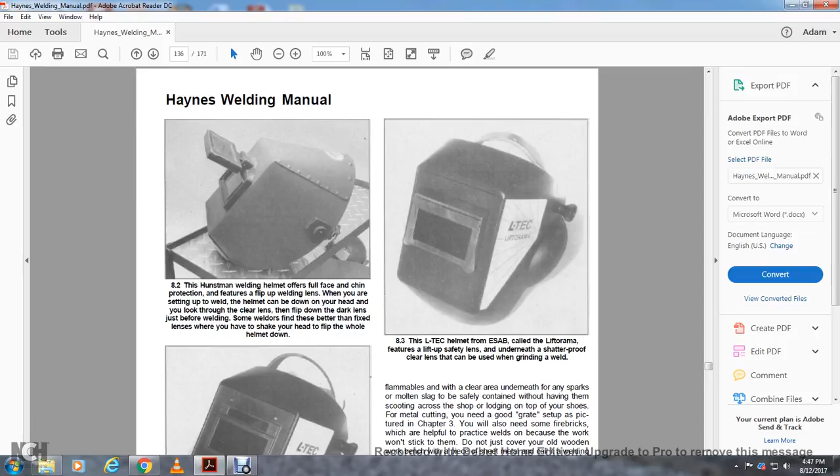8-3. The L-TEC helmet from ESAB, called the Liftorama, features a lift-up safety lens underneath the shatterproof clear lens that can be used when grinding a weld.

8-4. The L-TEC helmet Weldorama offers a clear sight plate and a separate welding lens, so the welder can keep the helmet down, then just shift his eyes to the dark lens when he's ready to weld.

Keep flammables clear, since sparks and molten slag can scoot across the shop and lodge on top of your shoes when metal cutting. You need to get a good grate set up, as pictured in Chapter 3.

You also need some fire bricks, which are helpful to practice welds on because the work won't stick to them. Do not just cover an old wooden workbench with a piece of sheet metal and call it a welding table. Invest in a piece of plate from the scrapyard.

When you put a lot of heat into your welding projects, a tin-covered wooden surface can heat up enough to start the wood smoldering, and perhaps even start a fire after you have left the shop.

Also, you must have a proper fire extinguisher on hand, preferably an ABC type or halon that can put out all kinds of fires.

Much of the work of sizing and joining materials for home shop projects involves tools you already have, such as drill presses, grinders, sanders, clamps, measuring equipment, squares, and levels. Common hacksaws can be used to sever lengths of material, but can be tedious on heavier stock.

Sheet metal can be cut with aircraft snips, tin snips, manual electrical nibblers, or a plasma cutter. Many of the tools shown are special purpose tools that you may not already have, which perform special functions related to improving the welding work or holding materials to be welded.

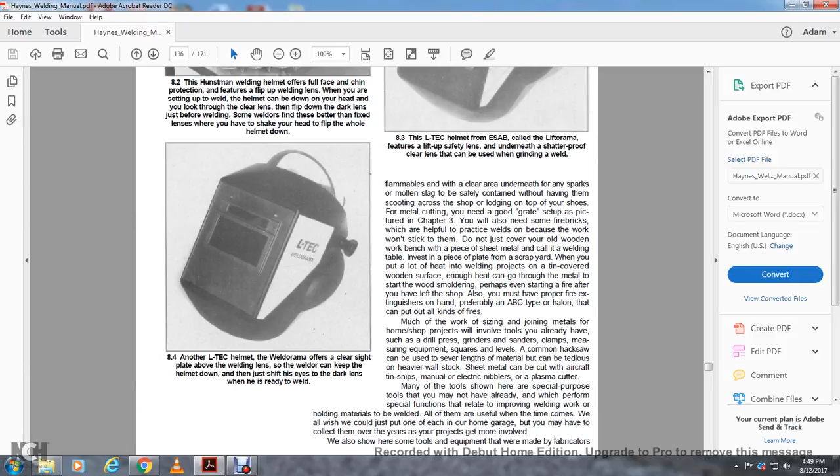We'll also show here some of the tools and equipment that were made by fabricators.

8-5. The Scanorama helmet was designed for the MIG and TIG welding application, with a large shade 5 filter disc surrounding the welding lens, so you can see most of the details through the area, while your skin is properly protected from radiation through the dark portion of the welding mask.

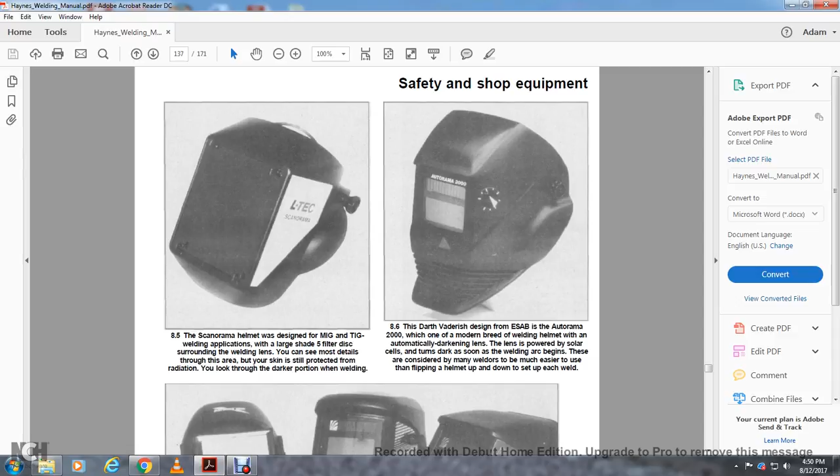The Darth Vader-ish design is the ESAB Autorama 2000, one of the modern breed of welding helmets with an automatically darkened lens. The lens is powered by solar cells and turns dark as soon as the welding arc begins. Many welders consider these much easier to use than flipping the helmet up and down to set up each weld.

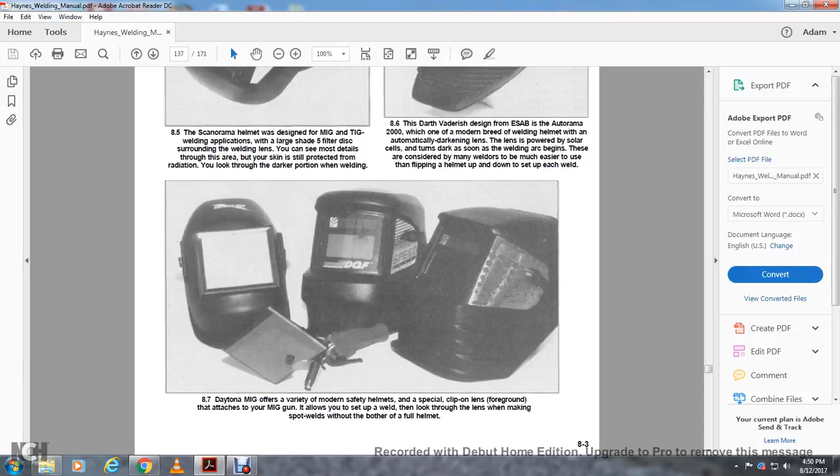Daytona MIG offers a variety of modern safety helmets have special clip-on lenses for foreground attachment with a MIG gun. You set up with a weld, then look through the lens to make spot welds without the bother of a full helmet.

8-8. A good pair of leather welding gloves will also last you for many years, but if you are using oxyacetylene equipment, keep an extra pair for that use, since a greasy or dirty glove combined with oxygen could cause combustion. So don't use good gloves for handling hot or dirty parts.

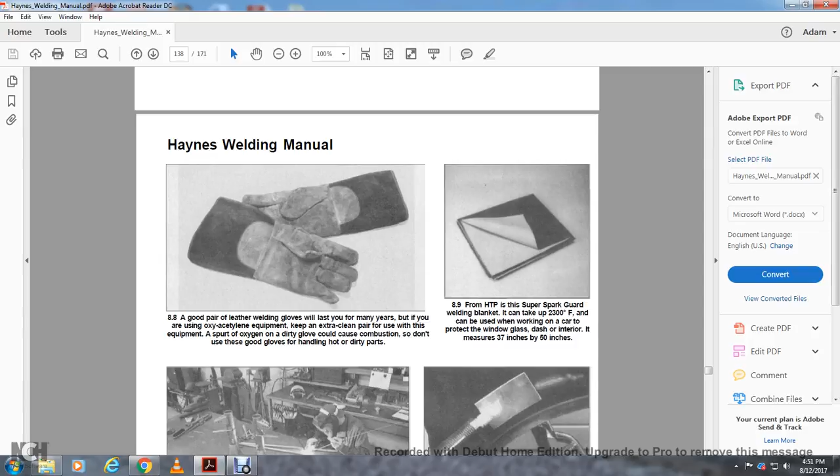Item 8-9, the HTP Super Spark Guard welding blanket. It can take up to 2,300 degrees Fahrenheit and can be used when working on the car, protecting window glass, dash, and interior. It measures 37 inches by 50 inches.

8-10. A clean, safe welding table area promotes good work in your home shop. You need a steel plate table, though your home shop won't need a table as big as this. What matters is keeping things uncluttered and organized like a professional shop. A rack under the table holds all the C-clamps.

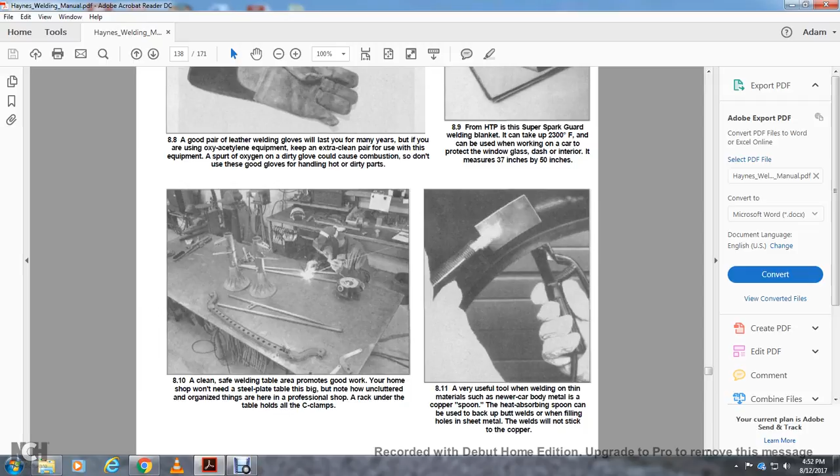A very useful tool when welding on material such as new car body metal is the copper spoon. This heat-absorbing spoon can be used for backing up butt welds when filling holes in sheet metal. The weld will not stick to the copper.

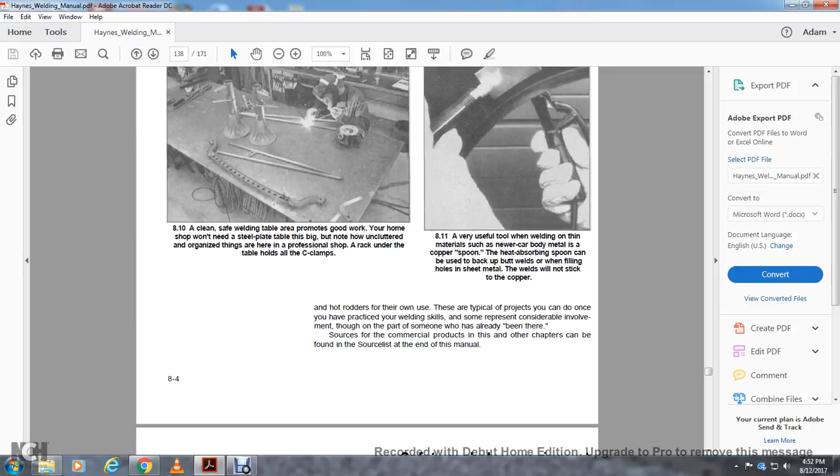Hot rodders making products for their own use is typical once they've developed welding skills. Some represent considerable involvement, and are only for someone who already has experience. Sources for the commercial products shown in this and other chapters can be found in the source list at the end of the manual.

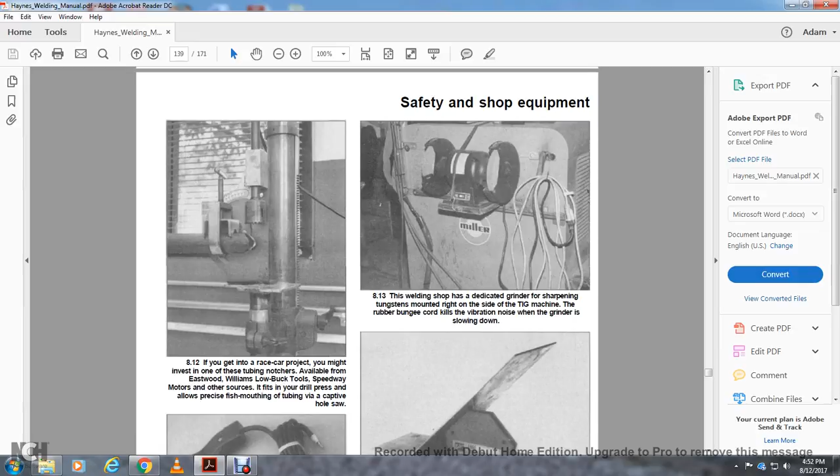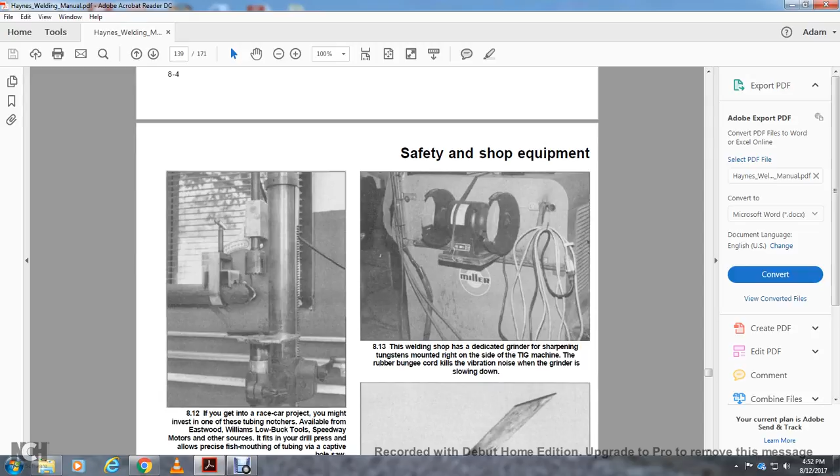8-13. A dedicated welding shop grinder for sharpening tungsten, mounted right on the side of the TIG machine. A rubber bungee cord isolates the vibration and noise of the grinder while it's running.

8-14. Magnetic clamps are handy for holding parts in alignment at various angles for tack welding.

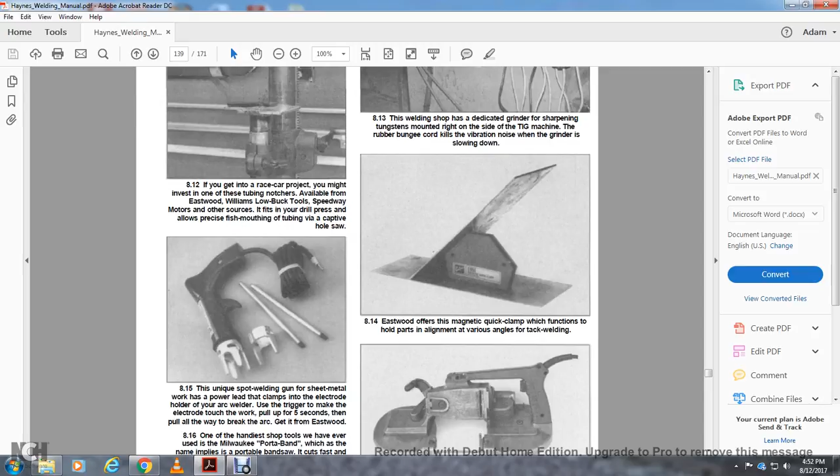8-15. A unique spot welding gun for sheet metal connects to the power leads and electrode holder of your arc welder. You pull the trigger to touch the electrode to the work, hold for about 5 seconds, then pull all the way to break the arc. You can get this from Eastwood.

8-16. One of the handiest shop tools you'll ever use is the Milwaukee Porta-Band. As the name implies, it's a portable bandsaw that cuts fast and straight, very helpful for cutting tubes, angles, and other chores associated with welding projects.

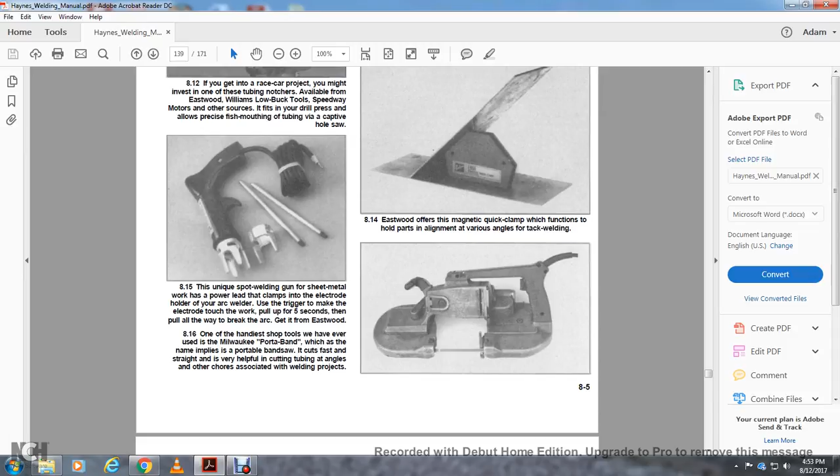8-17. An abrasive cut-off saw is very fast and secure for cutting large amounts of tubing. The work is held in a movable vise so angle cuts can be made. This one is cleverly mounted on a 55-gallon drum to capture all the sparks and debris.

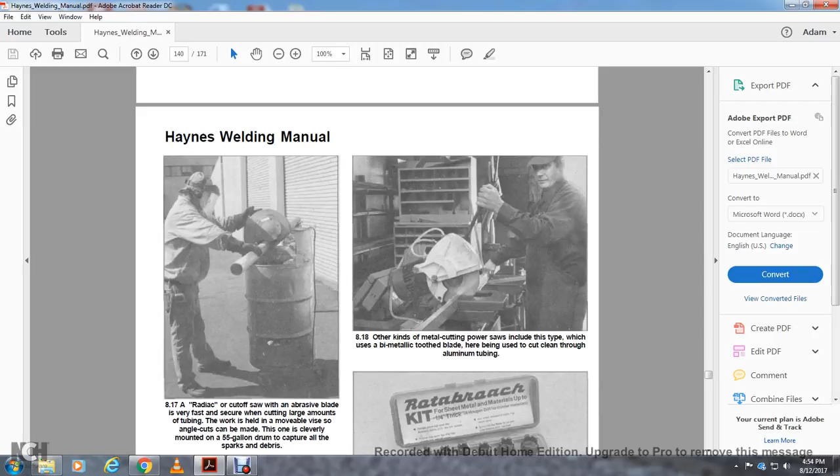8-18. Other kinds of metal cutting power saw blades include the bi-metal tooth blade, which cuts cleanly through aluminum tubing.

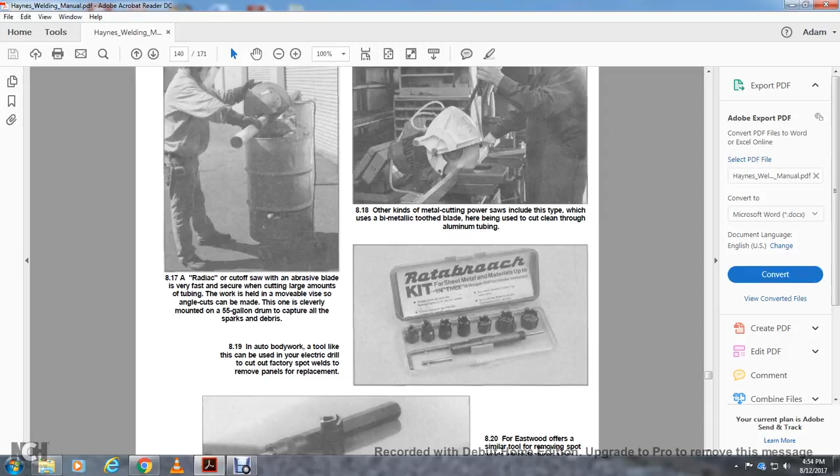8-19. An auto body tool, used in an electric drill, can cut factory spot welds to remove panels for replacement.

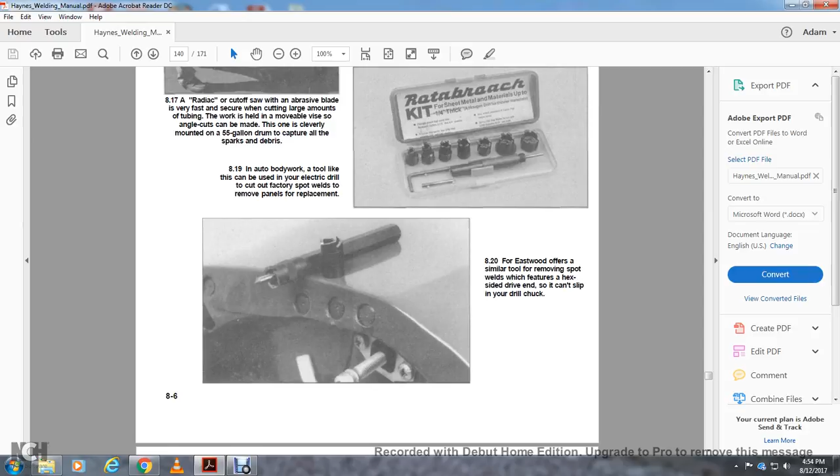8-20. Eastwood offers a similar tool for removing spot welds, featuring a hex drive end so that it cannot slip in your drill chuck.

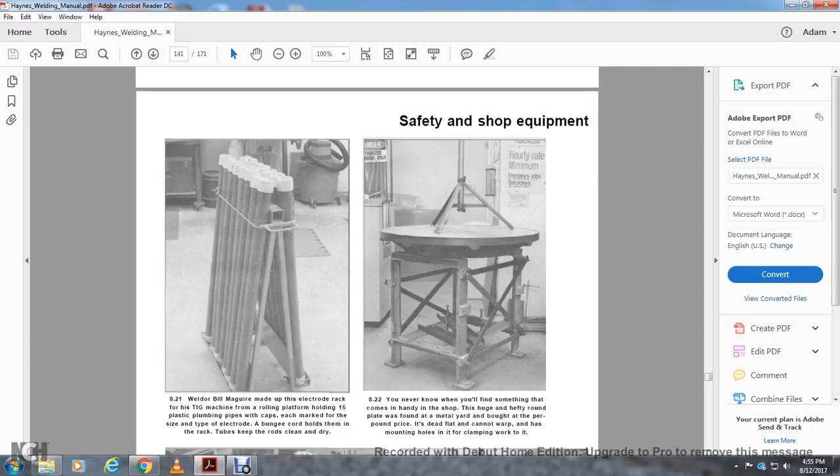8-23. If you plan to do any ornamental ironwork, making brackets and pieces like this, an ironworker is very handy. It can bend solid round, square, or hex stock, as well as round tube and flat stock, into repeatable shapes. A disc sander of at least 1/2 horsepower is also very handy around the shop for squaring edges of flame-cut parts and taking the sharp edge off corners of the work.

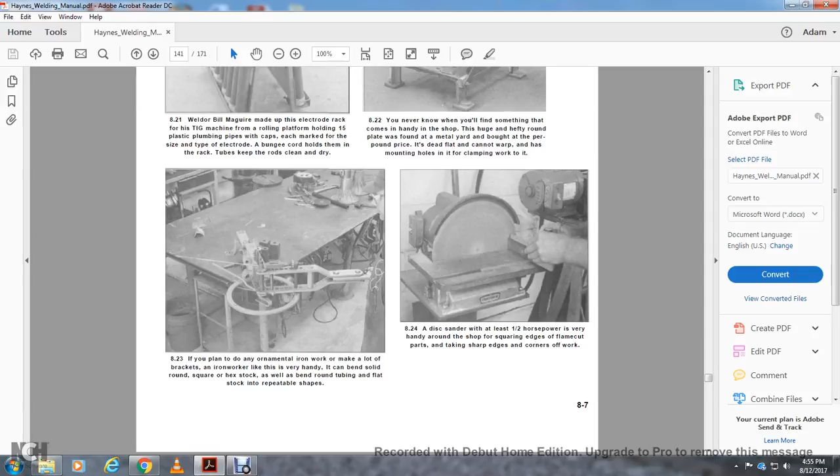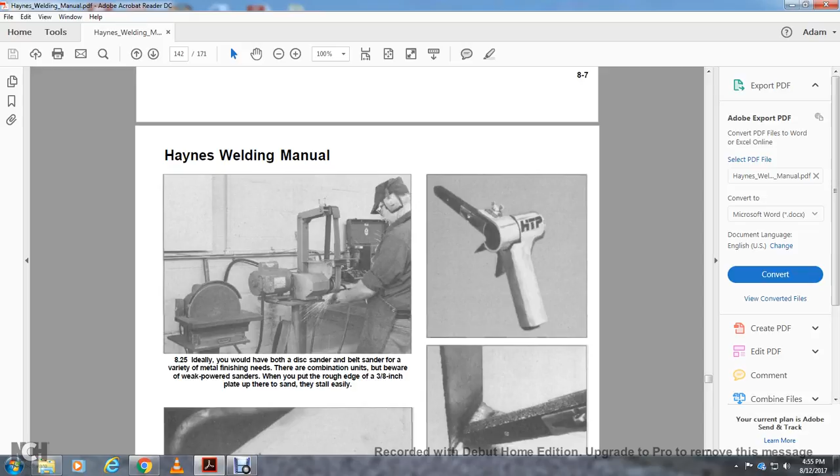8-25. Ideally, you would have both a disc sander and a belt sander for a variety of metal finishing needs. A combination unit offers both, but beware of underpowered sanders when working a rough edge of 3/8 inch plate up against the sanding belt, which can easily bog down.

The HTP belt sander is a clever tool that can reach deep corners and tight places where regular sanders and grinders can't reach. It uses 3/8 inch belts, and the belt guide rotates 160 degrees.

When replacing body panels, you need parts aligned properly before making a butt weld. The Eastwood intergrip clamps space two parts about .040 inch apart for full penetration. After tacking the panels, you can disassemble the clamps.

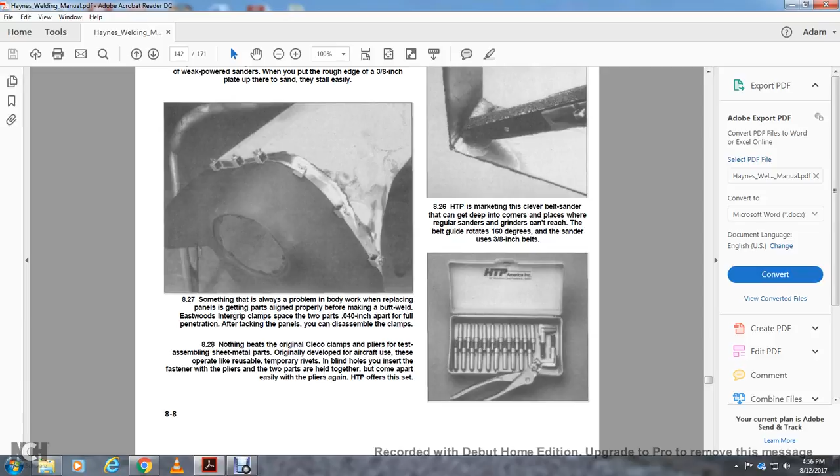Nothing beats the original Cleco clamps and pliers for test-assembling sheet metal parts, originally developed by the aircraft industry. These reusable temporary rivets fit into blind holes. You insert the fastener with the pliers to hold two parts together, and they come apart easily with the pliers again. HTP offers this set.

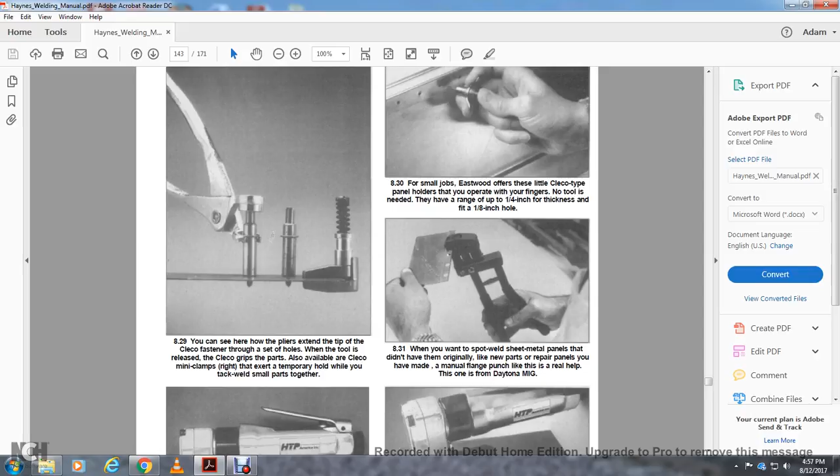You can see how the pliers extend the tip of the Cleco fastener into the hole while the tool is released. The Cleco grips the parts. Also available are The Cleco mini clamps provide a temporary hold while tack welding small parts together.

For small jobs, Eastwood offers this simple Cleco-type fastener that operates with your fingers, no tool needed. It has a range up to 1/4 inch thickness and fits an 1/8 inch hole.

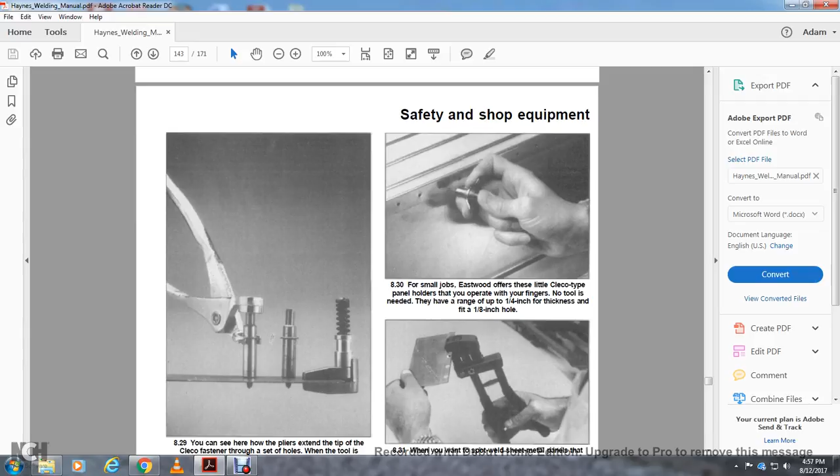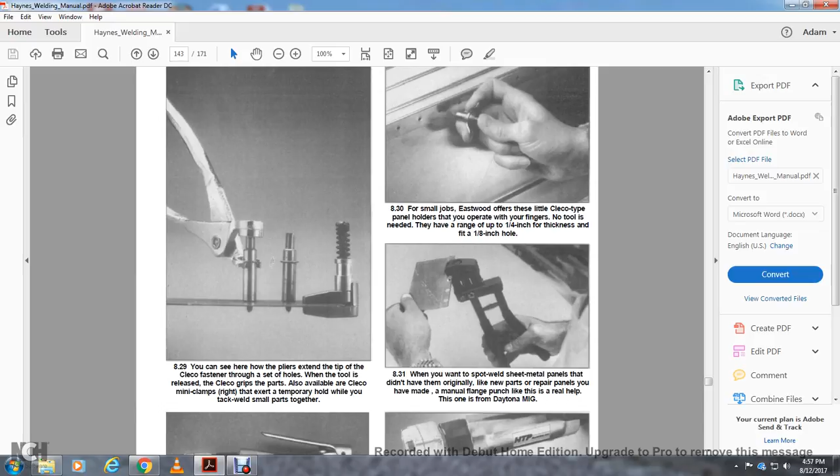When you want to spot weld sheet metal panels that don't originally have them, like new parts or repair parts, you may need a manual flange punch like this. This one is from Daytona MIG.

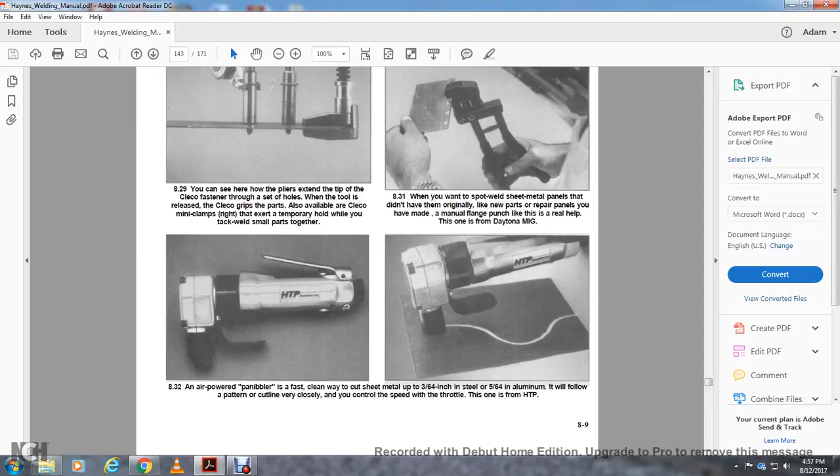An air-powered panibbler gives fast, clean cutting of sheet metal up to 3/64 inch in steel, and in aluminum up to 5/64 inch. It follows the pattern of the cut line very closely, and you control the speed with the throttle. This one is from HTP.

The HTP stud setter is a great boon to the body man who has to pull out creases and dents, avoiding drilling holes or using slide hammers that distort the metal even further. This 110-volt tool saves considerable time and labor.

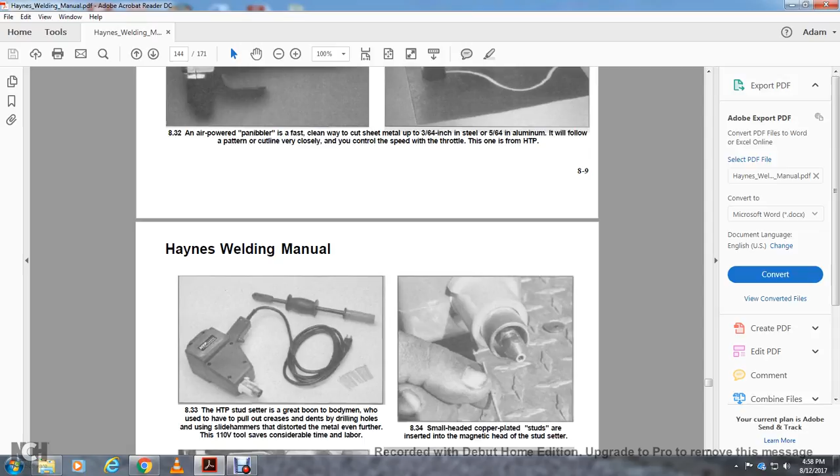Small copper-plated studs are inserted using the magnetic head of the stud setter. The tool is only used on a dented area that has been ground clean, and the metal tip is pushed into contact with the metal. The trigger is pulled for about half a second.

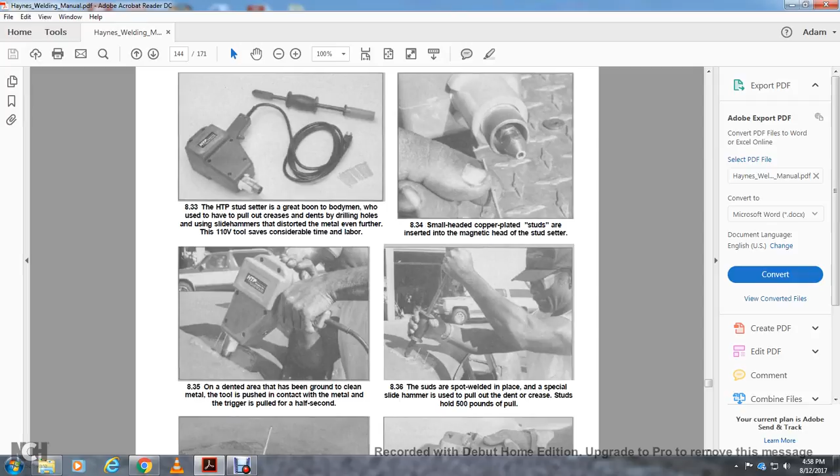A stud is spot welded in place, then special slide hammers are used to pull out the dents and creases. The studs hold about 500 pounds of pull.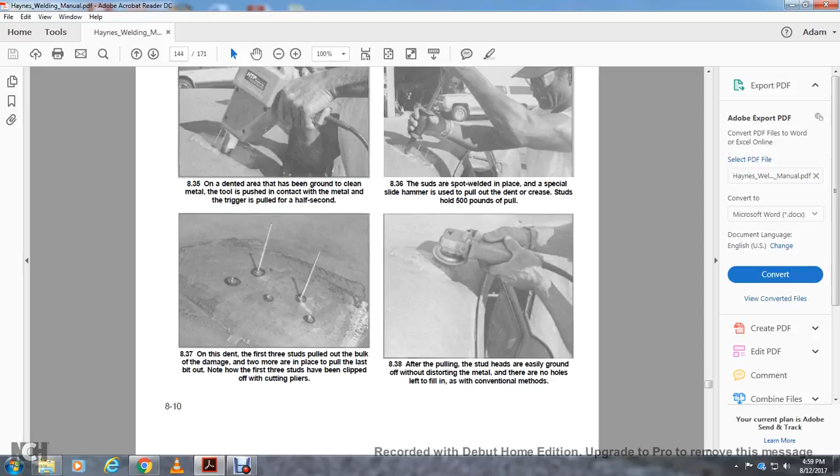After pulling, the stud heads are easily ground down without distorting the metal, leaving no holes to fill as with conventional methods.

Visit most street rod shops, fabrication shops, or race car facilities and you'll find a lot of shop equipment that's homemade. There are many things you can build yourself once you have welding and cutting equipment.

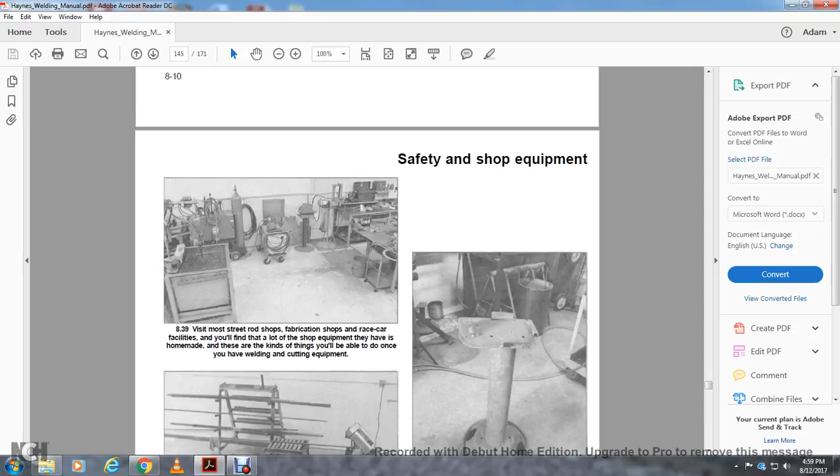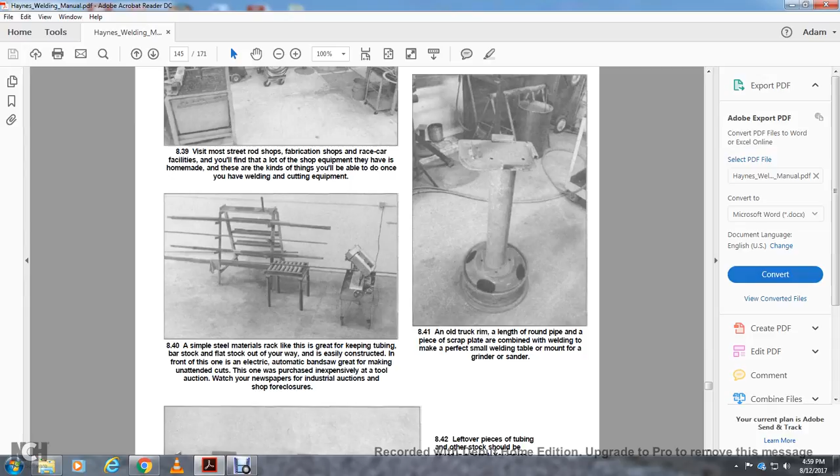A simple steel material rack like this is great for keeping tube, bar stock, or flat stock organized and out of your way. It's easily constructed in front of an electrical automatic bandsaw, great for making unattended cuts. This one was purchased at an inexpensive tool auction, which can be found through newspapers, industrial auctions, and shop foreclosures.

An old truck rim, a length of round pipe, and a piece of scrap plate combined with welding make a perfect small welding table, mounting table, or stand for a grinder or sander.

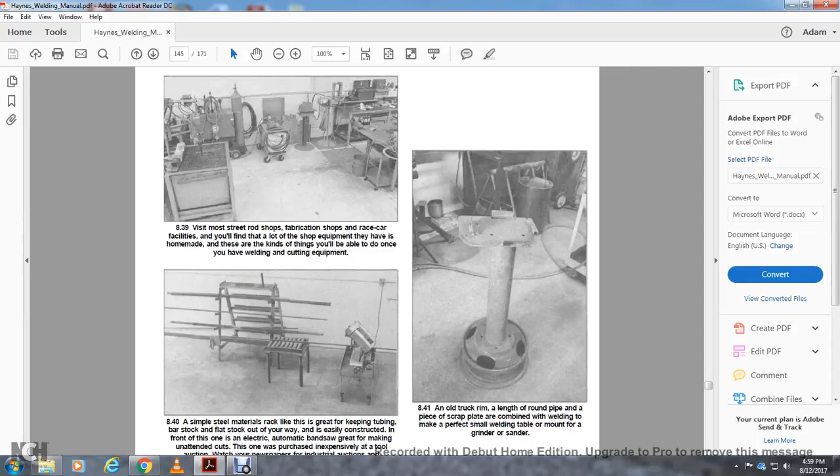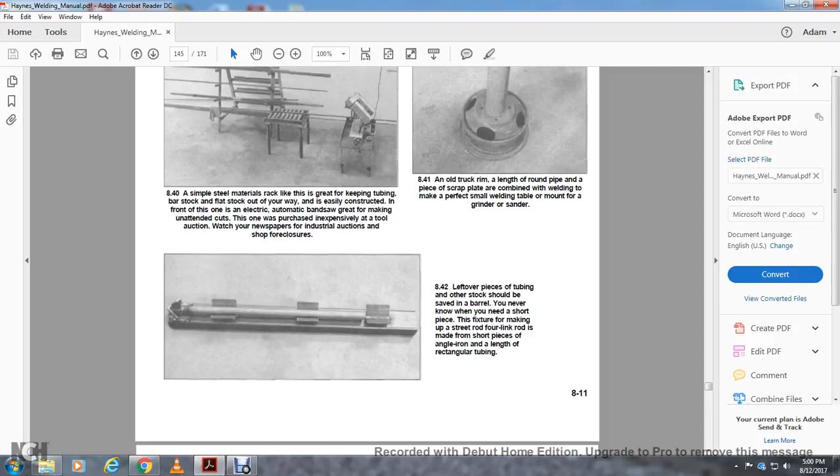Leftover pieces of tubing and other stock should be saved in a barrel. You never know when you'll need a short piece. For example, fixtures for a street rod 4-link, made from short pieces of angle iron and lengths of rectangular tubing.

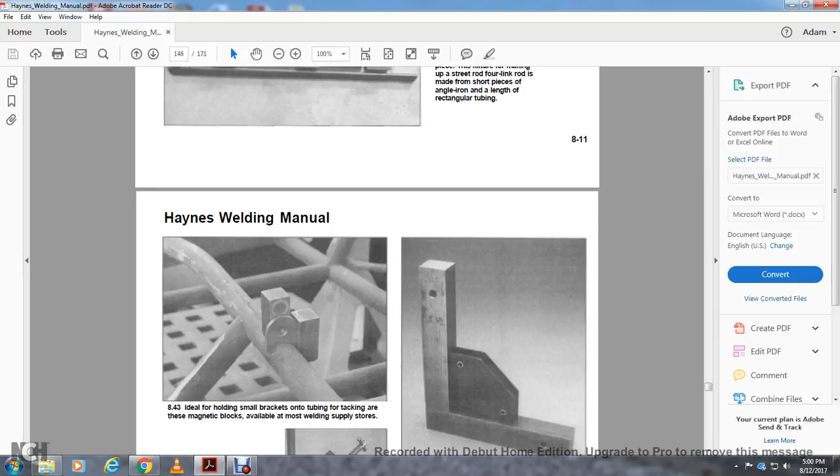For holding small brackets onto tubing during tacking, these magnetic blocks are available at most welding supply stores.

Another type of angle fixture from HTP is this welding clamp, which holds two parts at a perfect 90-degree angle for tack welding.

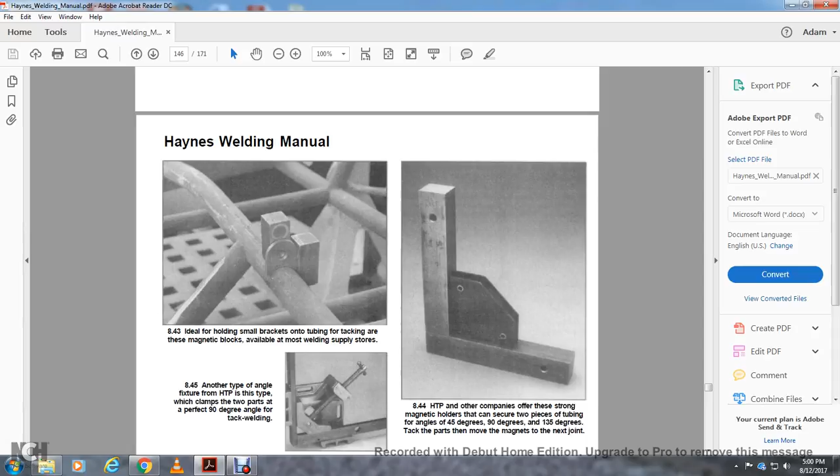HTP and other companies offer magnetic holders that can secure two pieces of tubing for angles of 45, 90, and 135 degrees. You tack the parts, then move the magnets to the next joint.

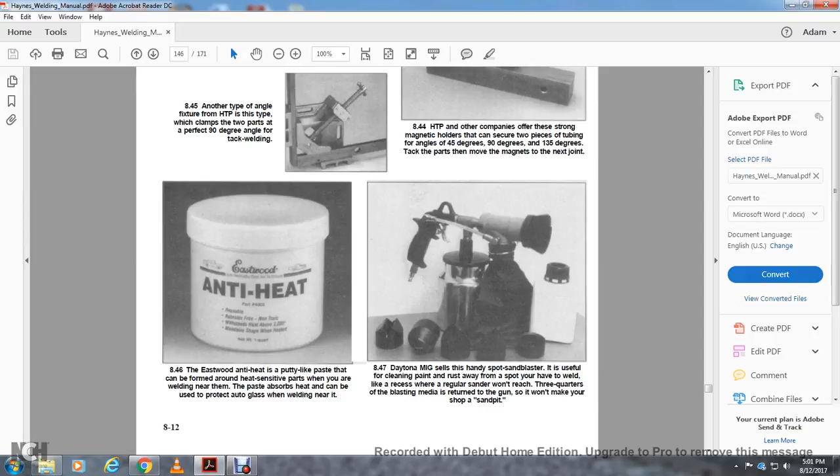The handy spot sandblaster lets you clean paint and rust away from spots you have to weld, reaching recessed areas that a regular sander won't reach. Blasting media is returned to the gun, so it won't make your shop a sand pit. Next, Chapter 9: Building a Utility Trailer.